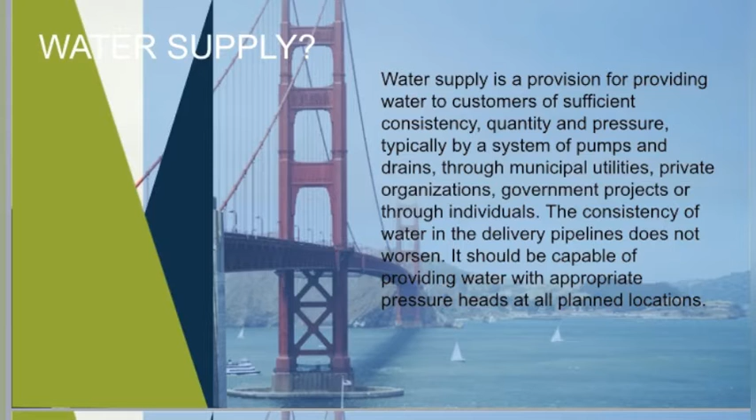What is water supply? Water supply is a provision for providing water to customers of sufficient consistency, quantity, and pressure, typically by a system of pumps and drains through municipal utilities, private organizations, government projects, or through individuals. The consistency of water in the delivery pipelines does not worsen. It should be capable of providing water with appropriate pressure heads at all planned locations.

Hot water supply system. Water heating is a thermodynamic mechanism that heats water above its original temperature using an energy source. Cooking, laundry, washing, and room heating are common household applications of hot water. Hot water and steam heated water have many applications in industry. In addition to domestic uses, it is necessary for commercial use such as hotels and corporate buildings.

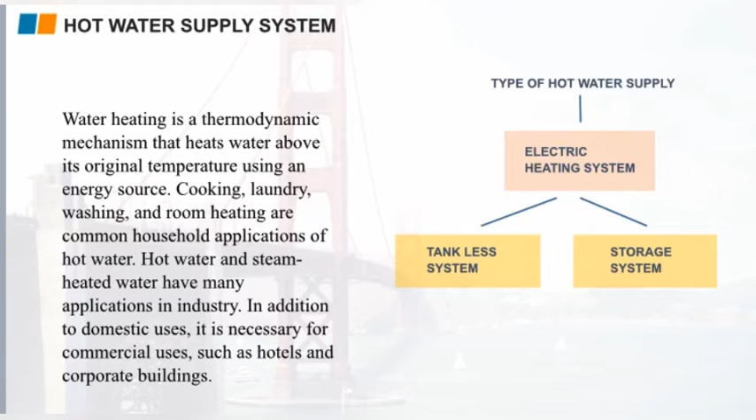Type of hot water supply is electric heating system. Electric heating system is divided into two types, which is tankless system and storage system.

What is tankless system? Tankless system has no tank. As required, there are superheated coils that fill in a flash of water and heat it, which is why it is alternately known as an on-demand water heater. For big families who require a large volume of hot water at once, this is ideal for rapidly heating water. This sort of water heater is available in various sizes, and make sure to have the correct one for buildings, since even a smaller tankless water heater will not be able to keep up with water usage, and it will result in lukewarm or cold water.

What is storage system? Storage tank system is the most popular type in families. A tank that contains water to be heated features this type of water heater. This ensures that how much hot water is available at once is determined by the capacity of the reservoir. The tank is insulated so that until it is required, it stays warm as the water heats up. Two valves, the temperature control valve and the pressure control valve, are included in this tank. Where the water reaches above 120 degrees Fahrenheit, the temperature control valve opens for heat and mild temperature to escape.

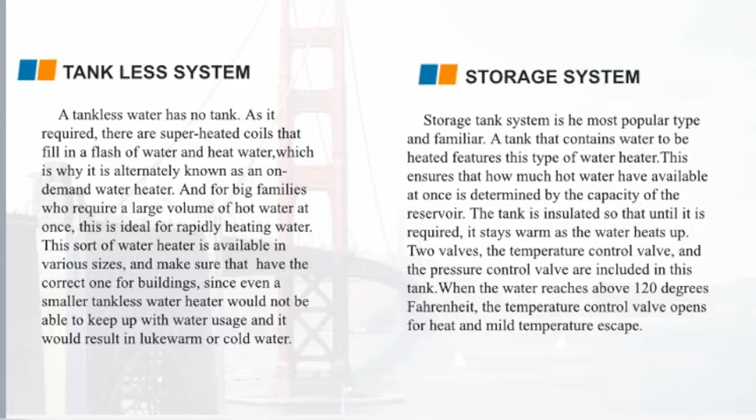And we go to cold water supply system. What is cold water supply system? It is natural water that is supplied in a building to sanitary devices without requiring any apparatus or system to regulate the water temperature in the pipe. For the inhabitants of buildings built for human habitation, a plentiful supply of wholesome water is necessary. Many buildings may receive their water supply from the main water agency, but water from private sources such as streams, rivers, reservoirs, well springs, or catchment areas from roofs and paved surfaces is often required in rural areas.

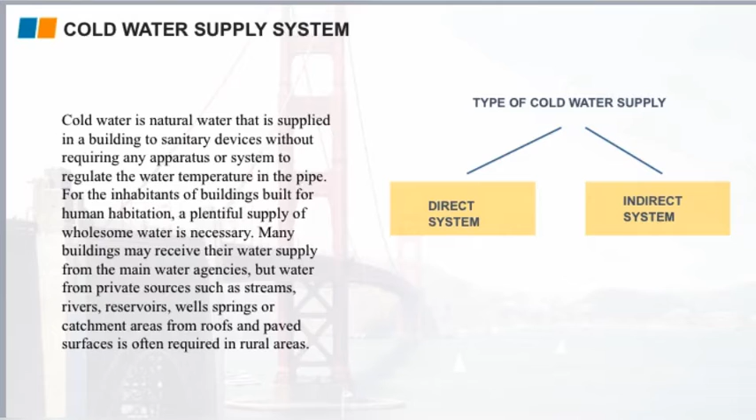The type of cold water supply is divided into two, which is direct system and indirect system. Direct system sources water directly from the mains water supply. They need smaller storage cisterns than indirect system and fewer pipe operations. They are cheaper to build. The building will only need water storage for hot water if having a direct cold water system. As they are attached to the main supply, both taps dispense drinkable water. A direct flow of water has a higher chance of contamination than an indirect source. They are also impacted by the system's burst pipes, meaning replacements and leakage that can lead to a shortage of water from the building.

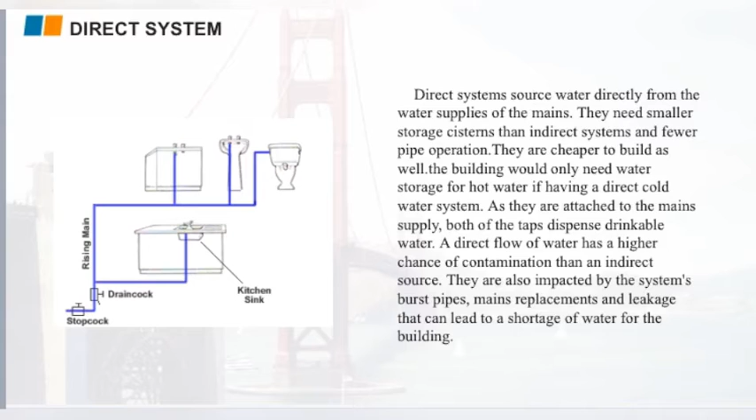Indirect system. Indirect cold water services are used where the main supply is unable to provide water to a significant number of properties at peak hours. Building less burden on the mains water supplies with the use of indirect cold water system. Indirect network of cold water needs greater storage and more pipe work because they supply hot and cold services of water. In an indirect source of cold water, only those taps required for drinking water and food processing will supply water from the main supply. The others will be supplied from the storage cistern.

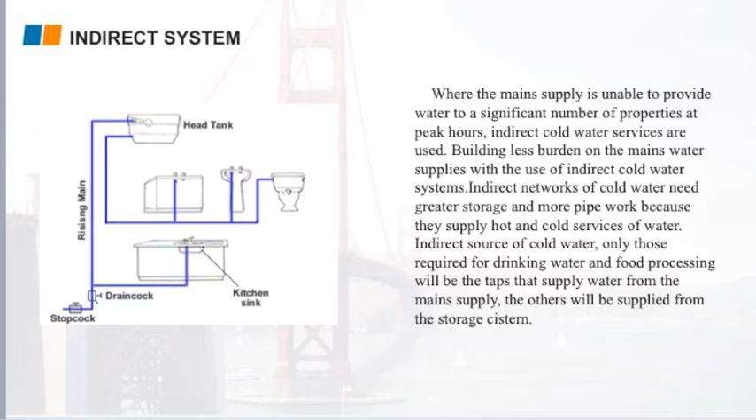The last topic is the advantages of the tankless system. First, it is a good choice for buildings that consume 40 gallons or less of hot water daily. Second, it provides savings of up to 30% more energy by installing an instant unit. Third, it provides savings of up to 15% for buildings using around 80 gallons per day, making the tankless system cost effective.

The advantages of the storage system are lower installation cost and no need for natural gas line changes or circuitry changes. It does not need a high flow rate and provides immediately hot water.

The advantages of the direct cold system: it reduces pipe work and cost, and pipes to and from tank for cold water are omitted. Second, potable, good quality drinking water is available at all taps. Energy is saved as pumps are not required to pump water to tanks. It reduces the chance of bacterial contamination, and the direct cold system maintains water quality.

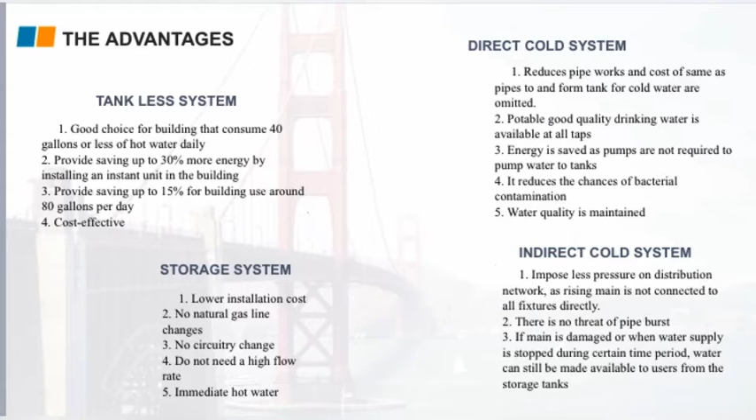The last one is the advantages of the indirect cold system. It imposes less pressure on the distribution network as the rising main is not connected to all fixtures directly. Second, there is no threat of pipe burst. Third, if the main is damaged or water supply is stopped during a certain time period, water can still be made available to users from the storage tanks.

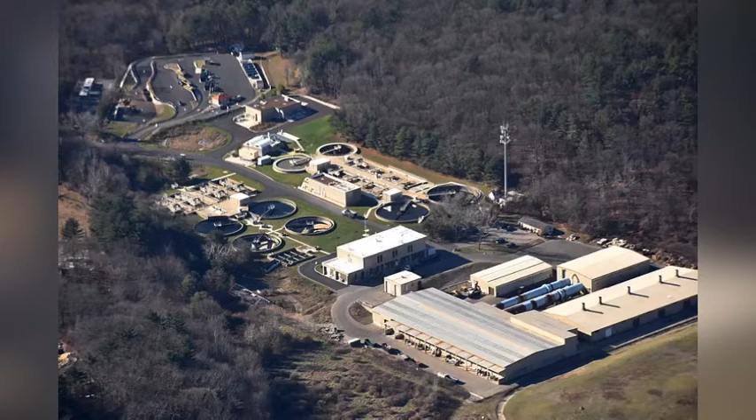Sewage treatment is a process of removing contaminants from municipal waste. Sewage treatment is also known as wastewater treatment, and can also refer to industrial wastewater. In cities, the sewer system also carries the proportion of industrial effluent in sewage treatment.

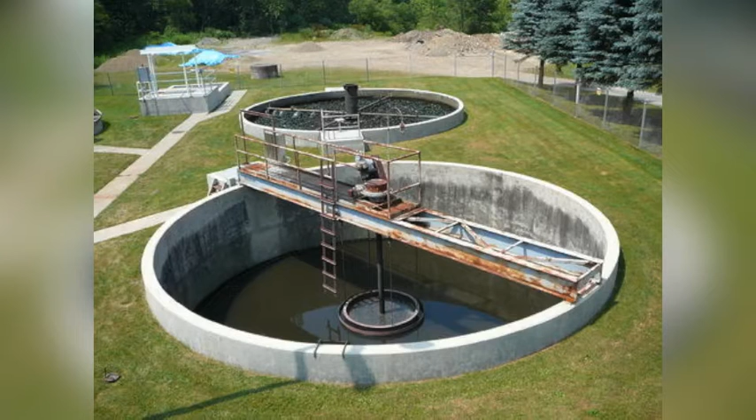This is one of the types of sewage treatment, which is the activated sludge plant. It is a system that usually needs servicing on at least a 6 month basis, requires maintenance by a qualified engineer, and this kind of treatment maintains the wastewater system. The ASP functions properly and maintenance is essential.

There are 3 steps in the sewage system: primary, secondary, and tertiary treatment. In the primary stage, wastewater flows into a primary clarifier. In this tank, it is a settlement basin where wastewater flows sluggishly.

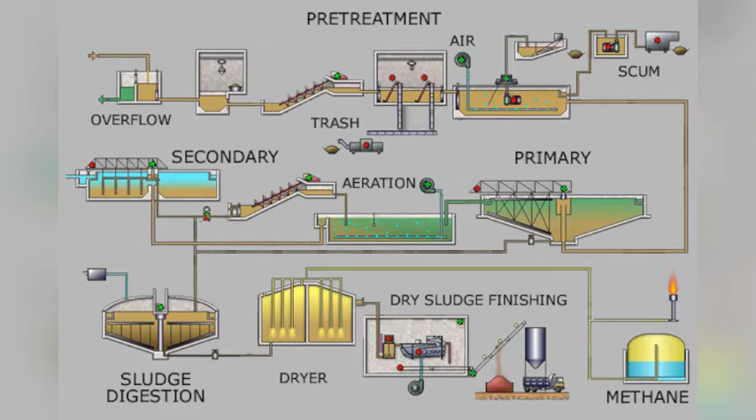In the tertiary treatment, it is a waste treatment where water waste flows through sand filters and then the remaining fine particulate matter is removed. The water then flows under ultraviolet UV light, which targets bacteria and viruses, removing their infectious capabilities. The UV light doesn't kill this microorganism.

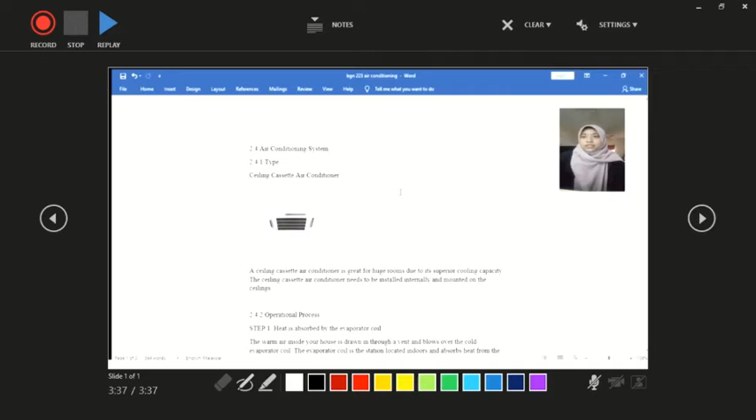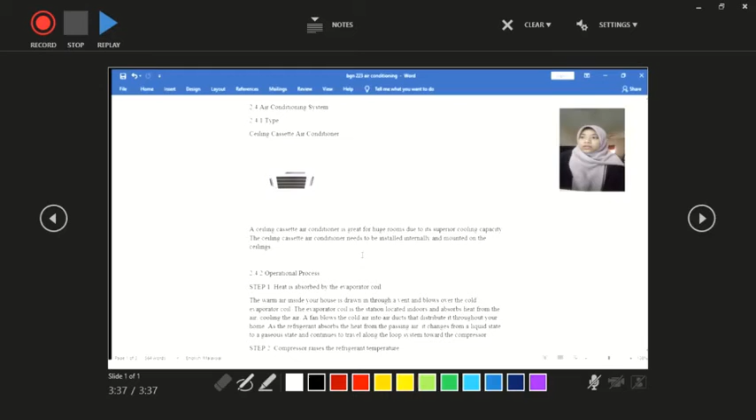We always see this type of air conditioner in hospitals, so for this private hospital I will choose the ceiling cassette air conditioner. A ceiling cassette air conditioner is great for huge rooms due to its superior cooling capacity. It needs to be installed internally and mounted on the ceiling. These types of air conditioners are always used in huge rooms such as offices and malls.

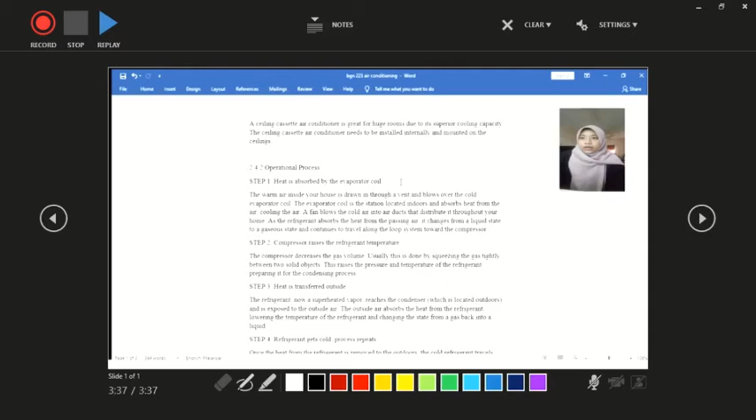Next is the operational process. Step 1, heat is absorbed by the evaporator coil. Step 2, the compressor raises the refrigerant temperature. Step 3, heat is transferred outside. Step 4, the refrigerant gets cold, and the process repeats.

Next are the benefits or advantages of this air conditioner. First, installing a ceiling cassette air conditioner on the ceiling saves a significant amount of space and makes it almost invisible. Second, the ceiling cassette air conditioner ensures good distribution of air in the room, due to powerful fans which regulate proper air distribution in larger spaces compared to ordinary air conditioners.

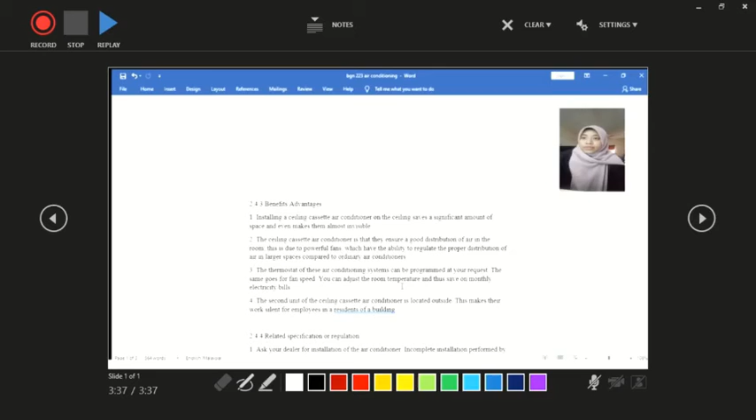Third, the thermostat of this air conditioning system can be programmed at your request, the same goes for fan speed. You can adjust the room temperature and thus save on monthly electricity bills. Fourth, the second unit of the ceiling cassette air conditioner is located outside, making their operation silent for employees in a residence or building.

Next, we go to the related specification or regulation for this air conditioner. First is ask your dealer for installation of the air conditioner. Incomplete installation performed by yourself may result in water leakage, electric shock, and fire. And it's very dangerous for us.

Next is never let the indoor unit or the remote controller get wet. It may cause an electric shock or a fire. Third, never replace a fuse with one of the wrong ampere rating or other wires when a fuse blows out. Using a wire or copper wire may cause the unit to break down or cause a fire.

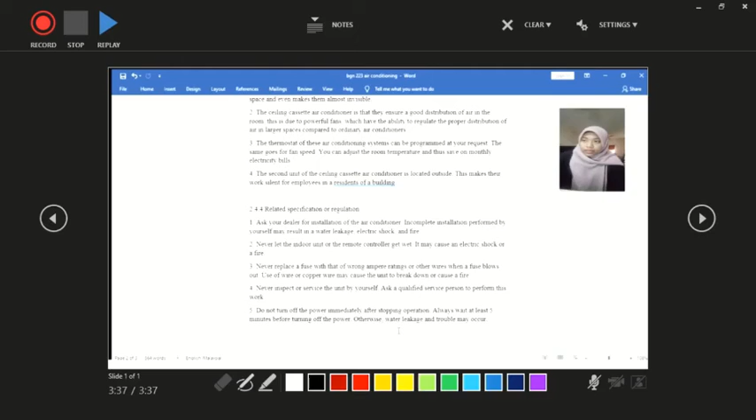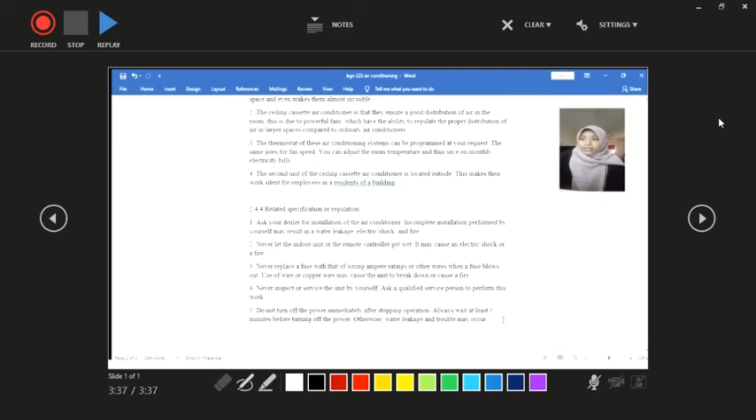Fourth, never inspect or service the unit by yourself. Ask a qualified service person to perform this work. So it's not safe for us to service the unit by ourselves. Next is do not turn off the power immediately after stopping operation. Always wait at least 5 minutes before turning off the power. Otherwise, water leakage and trouble may occur.

So this is what I recommend for the private hospital: the ceiling cassette air conditioner.

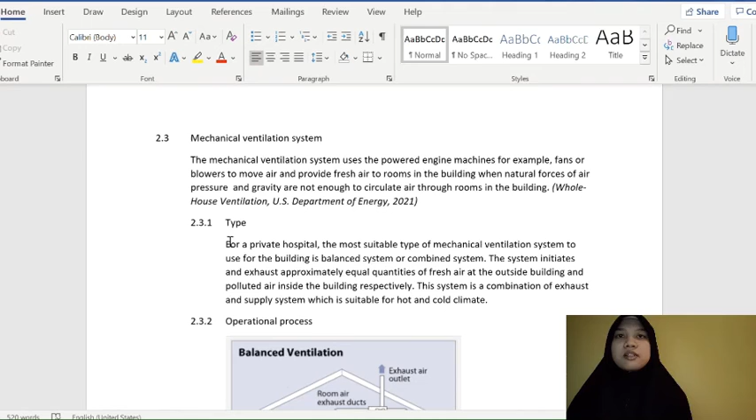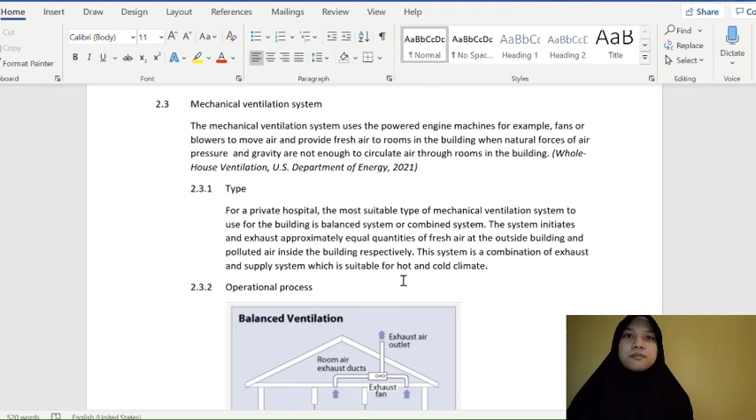I will be presenting about mechanical ventilation system. The mechanical ventilation system uses powered engines, for example fans or blowers, to move air and provide fresh air to rooms in the building when natural forces of air pressure and gravity are not enough to circulate air through rooms in the building. For a private hospital, the recommended type of mechanical ventilation system is the balanced system or combined system. The system introduces and exhausts approximately equal quantities of fresh air from outside the building and polluted air inside the building, respectively. This system is a combination of exhaust and supply system which is suitable for hot and cold climates.

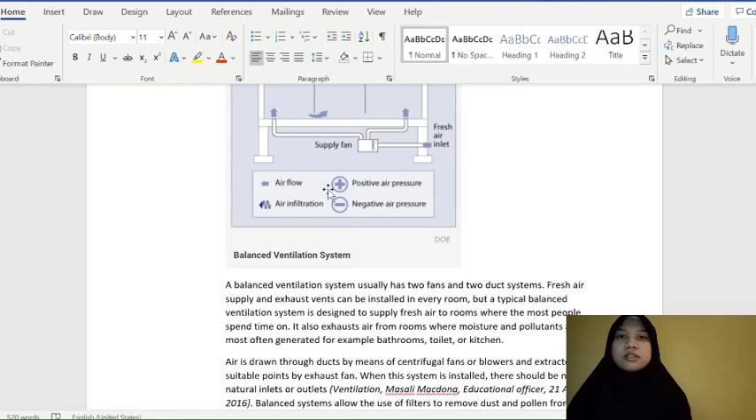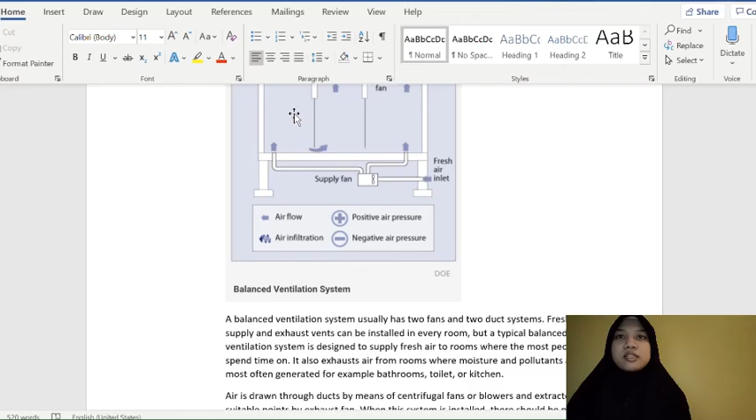So the balanced system has two fans and two duct systems. Fresh air supply and exhaust vents can be installed in every room, but a typical balanced ventilation system is designed to supply fresh air to rooms where most people spend time. It also exhausts air from rooms where moisture and pollutants are most often generated, for example bathrooms, kitchen, or toilet. Air is drawn through ducts by means of centrifugal fans or blowers and extracted at some point by an exhaust fan. When this system is installed, there should be no natural inlets or outlets.

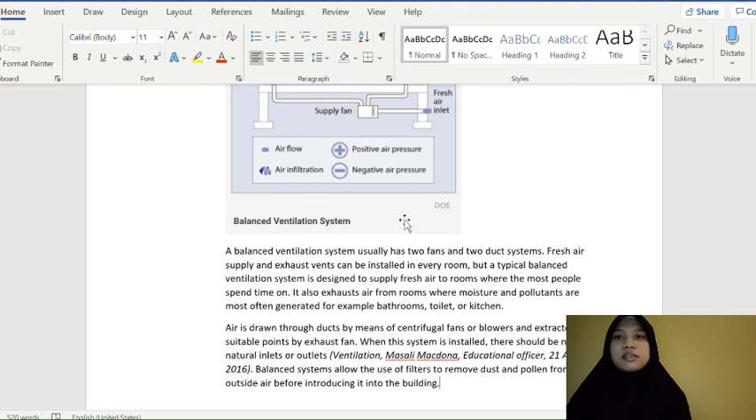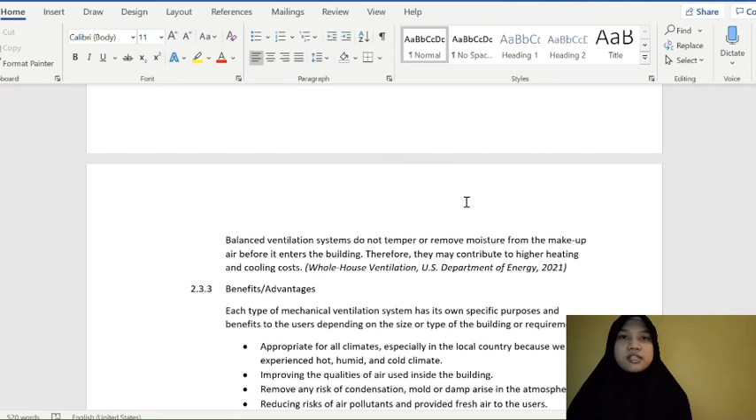Balanced system allows the use of filters to remove dust and pollen from outside air before introducing it into the building. Balanced ventilation systems do not temper or remove moisture from the makeup air before it enters the building. Therefore, they may contribute to higher heating and cooling costs. A benefit of this type of ventilation system is it is appropriate for all climates, especially in our local country because we experience hot, humid, and cold climate.

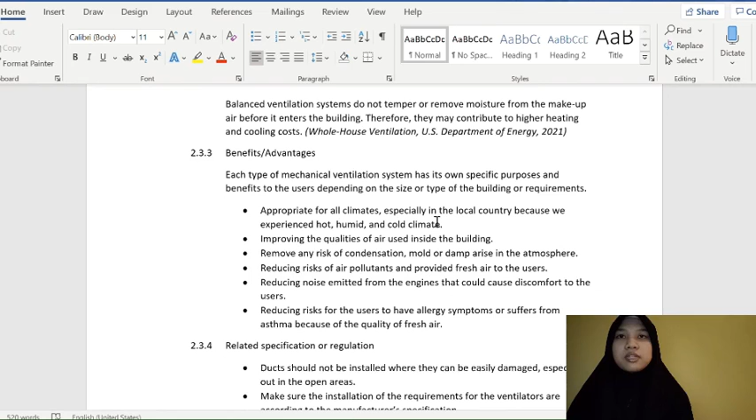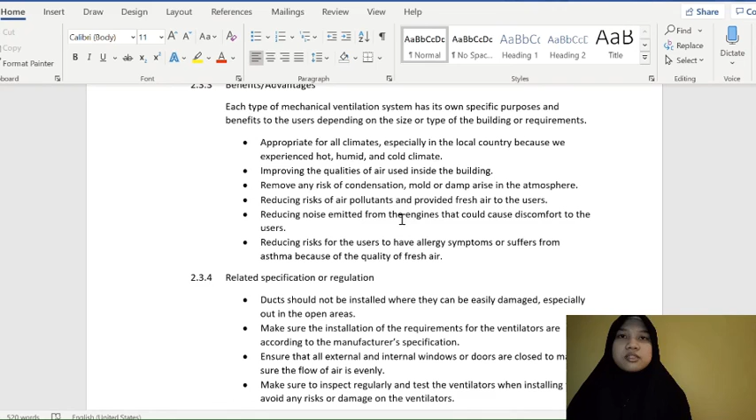Improving the quality of air used inside the building, removing any risk of condensation, mold, or damp arising in the atmosphere, reducing risk of air pollutants, and providing fresh air to the occupants, reducing noise emitted from the engines that cause discomfort to the users, reducing risk for the users to have allergy symptoms or suffer from asthma because of the quality of fresh air.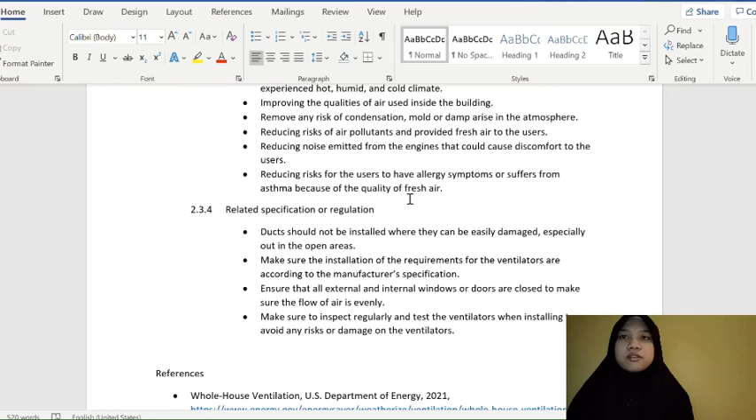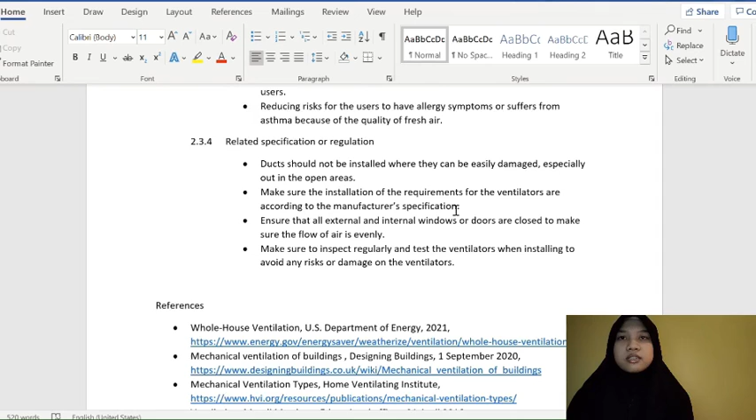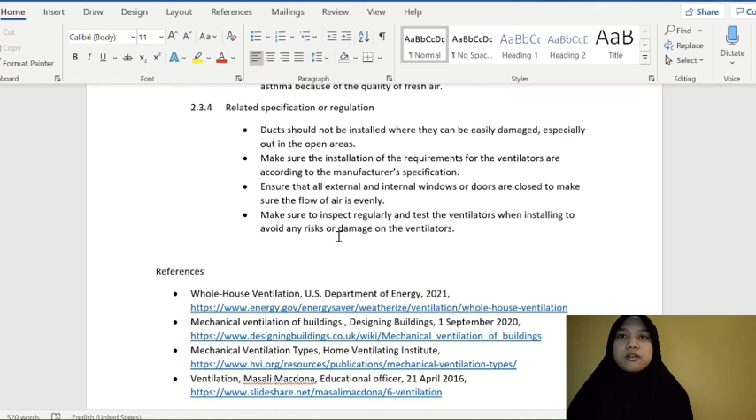Any related specification or regulation is that ducts should not be installed where they can be easily damaged, especially out in the open areas. Make sure the installation requirements for the ventilators are according to the manufacturer's specification. Ensure that all external and internal windows or doors are closed to make sure the flow of air is even. Make sure to inspect the ventilators regularly and test the ventilators when installing to avoid any risk or any damage to the ventilators. So that's all from me.